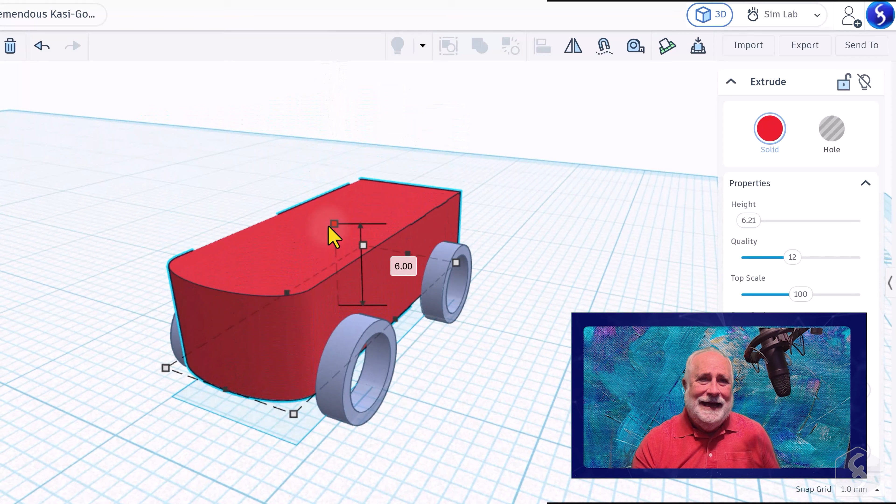Hello and welcome to our beginner tutorial on Tinkercad, a free online CAD tool that makes it easy to create simple 3D models directly from your browser. We're also going to show you how to build a simple toy car from scratch, and we'll prepare it for 3D printing and show you exactly how to simulate it live.

To get started, open Tinkercad.com and sign in to reach your main dashboard. In the top right corner, click Create and select 3D Design. Your workspace will open, showing an empty project and its work plane. This represents the ground plane where you will build and modify all your 3D models.

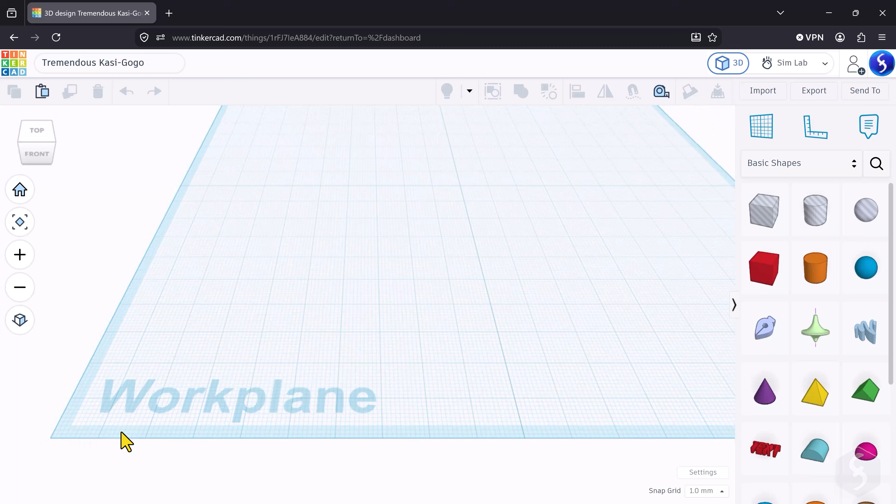Before you start modeling in 3D, configure your project settings by clicking Settings in the bottom right corner. Here you can switch your measurement units to metric, or enlarge the workplane grid if you need extra room.

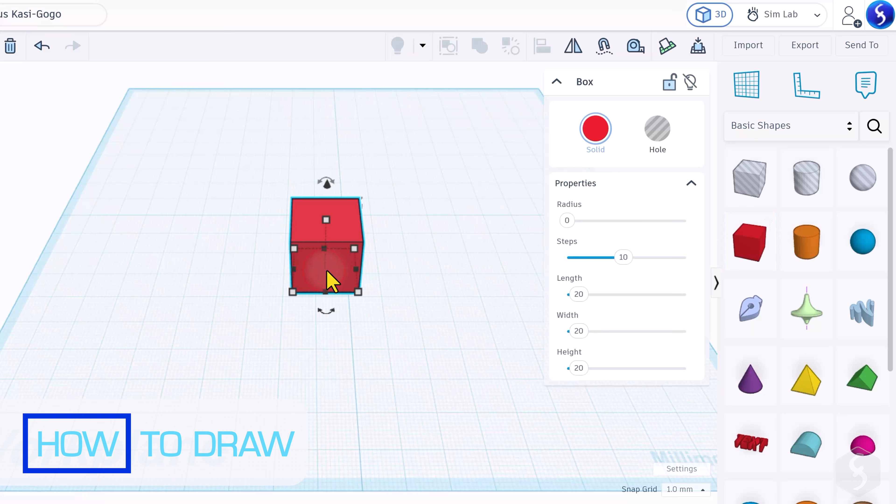On the right panel, you have a library of standard 3D shapes. Click on a box, cylinder, or pyramid to drop it right onto the ground plane. To inspect your design, hold down the right mouse button and drag to orbit around your models, or use your mouse wheel to zoom in and out.

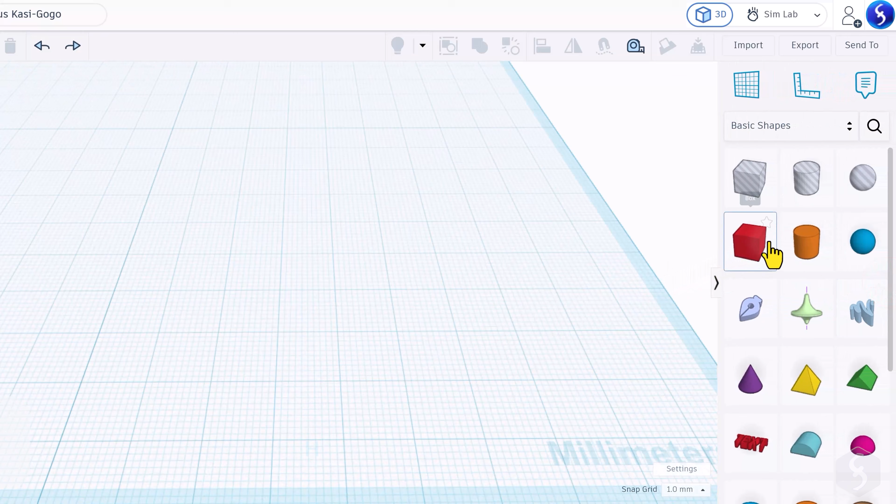Now let's start building the body of the toy car. Instead of using a standard box shape, we can select Extrude Sketch and draw the body directly. Click anywhere on the preview to enter sketch mode. On the left panel, grab the Line tool and click to place connected line segments.

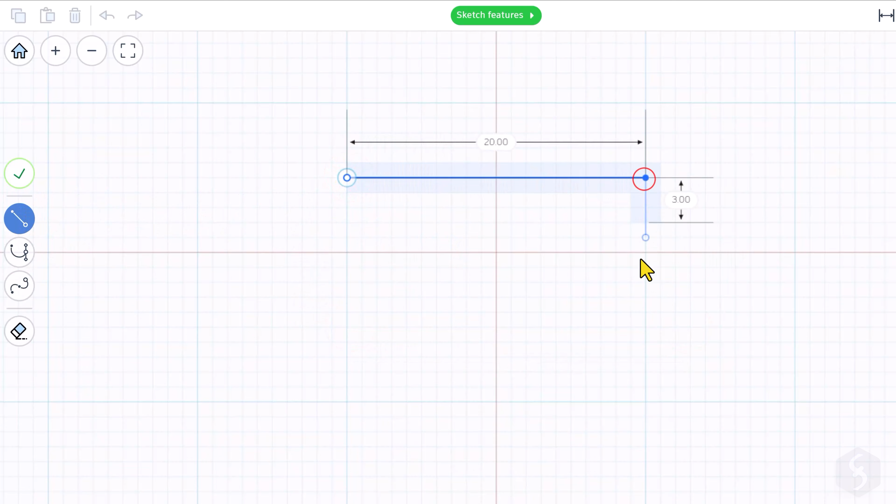If you make a mistake, simply press Backspace to delete the shape. Just make sure your drawing forms a completely closed shape, or Tinkercad won't be able to turn it into a 3D model. If you want smooth curves on your car body, select Edit on the left.

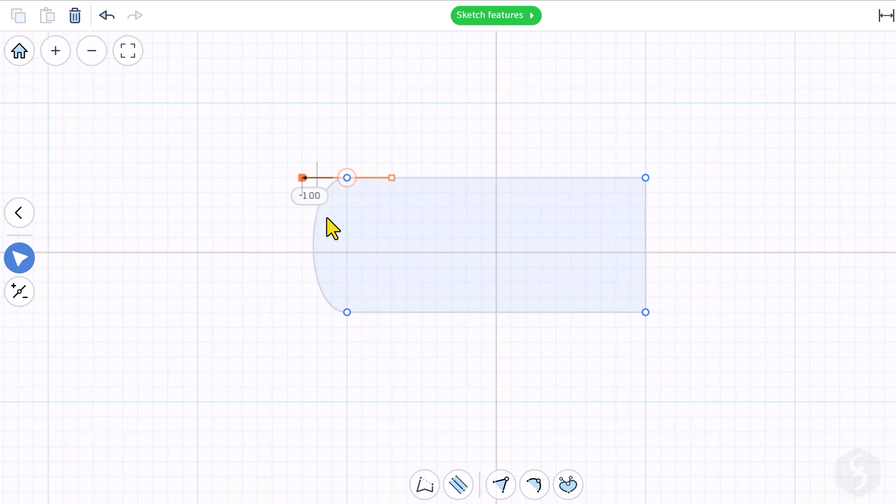Select any anchor point, change its type at the bottom, and adjust the curve using its handles. You can always press Ctrl or Command and Z to undo any changes. When you are happy with your outline, click Finish Sketch in the top right corner.

Tinkercad will instantly extrude your 2D sketch into a 3D object. You can always double-click the design to return to sketch mode and continue editing it.

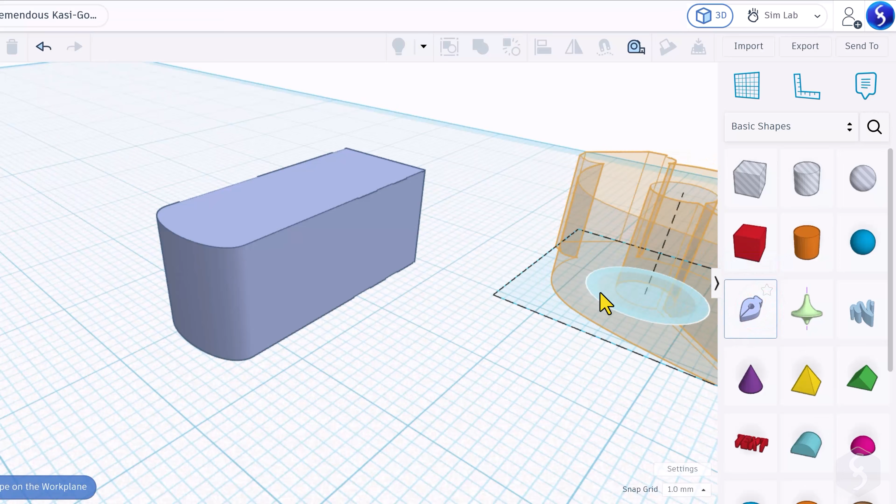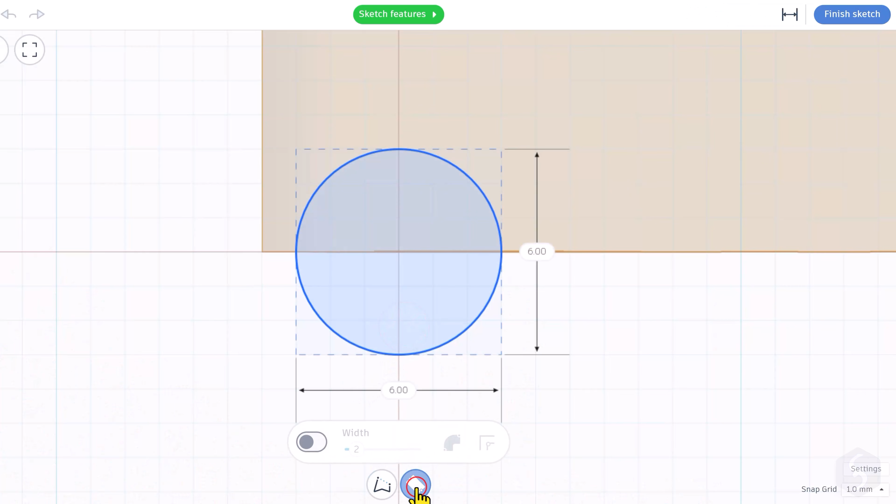To add the wheels, use the Extrude Sketch tool directly on one of the side faces of the car body. Start by sketching a square, which we can easily convert into rounded circles with the Edit option. Click Finish Sketch. The wheels will look like cylinders because the extrusion is too high. To make the wheels hollow, head to Stroke Settings at the bottom and adjust the stroke value.

Whenever you click an object, the Properties panel on the right allows you to adjust its extrusion depth, size, or change its color by clicking Solid.

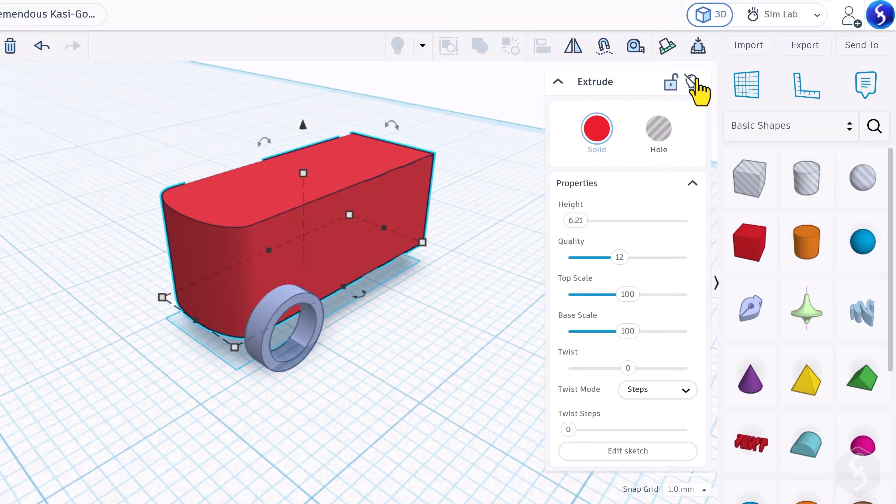In the top right corner of the Properties panel, you'll find two buttons. Click the Hide button to make an object temporarily invisible and unselectable, giving you a clear view of your work. When you need it back, simply click Show All at the top. You can also use the Lock button to lock an object so you do not accidentally move or change it.

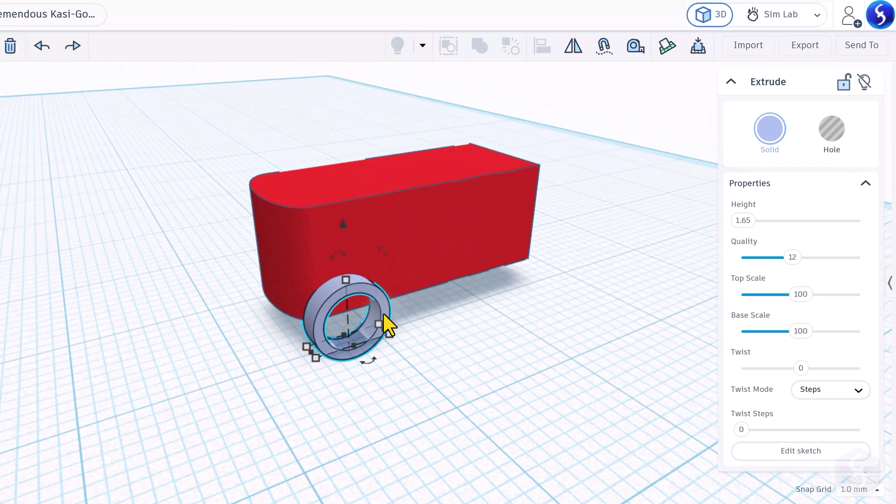How can you position your shapes with absolute precision? When you drag an object, you move it along the flat X and Y axis while holding its height steady. For more precise movements, use the arrow keys on your keyboard. The object moves according to the snap grid settings in the bottom right corner. A smaller grid gives you finer control.

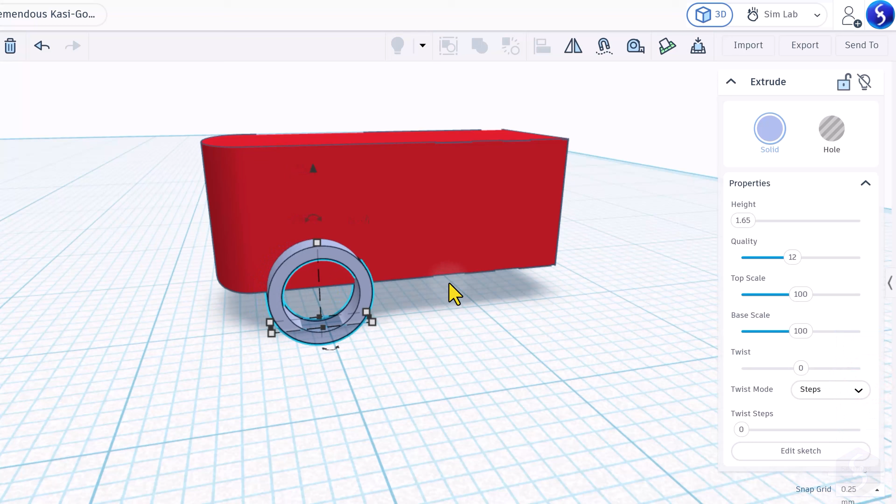You can hold the Alt key while dragging any shape to duplicate it. You can delete items with the Backspace key and undo actions using Ctrl or Command and Z.

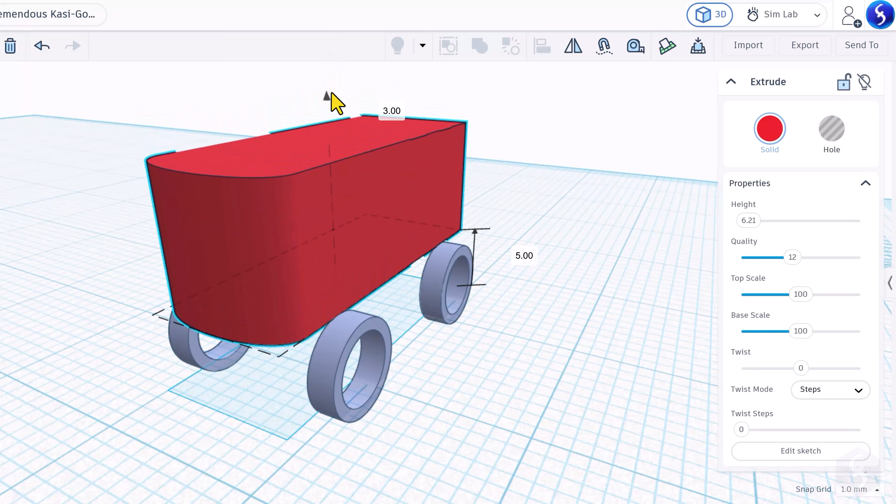When you select a shape, several control nodes appear. Click and drag the black arrow at the top to raise or lower the object from the ground plane, or drag the white nodes to reshape it.

To get exact dimensions, click directly on any measurement, type in your value, and press Enter. You can also drag the curved arrows to turn your shape to the exact angle you need.

Now, let's add two simple holes to represent the seats. Select Extrude Sketch and draw two rectangles on top of the car body where the seats will be.

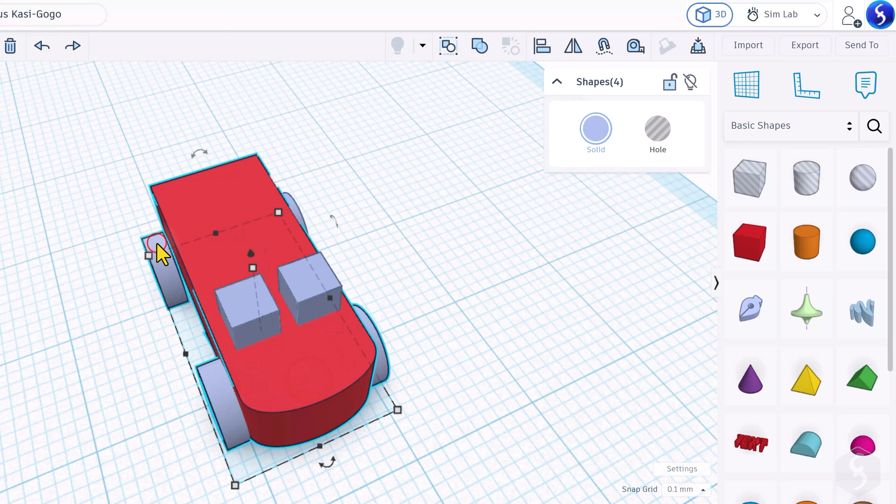If you leave these as separate objects, moving the car later will leave the seats behind. To lock them together, hold down the Shift key and click each object to select them all. If you click Union Group, Tinkercad merges the selected objects into a single solid shape with one set of properties, such as color and size.

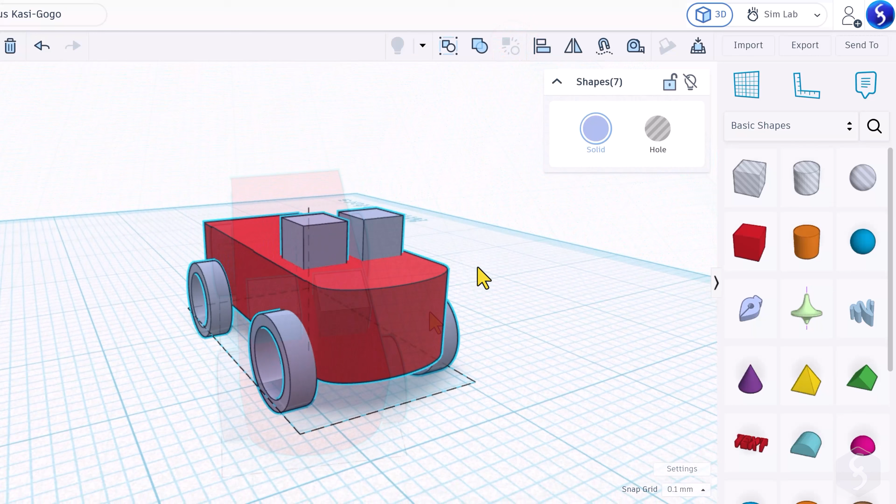This is not the right one for the toy car, so select the object and choose Ungroup to restore the shapes. At this point, with all objects selected, you can use Bundle Group instead. This option allows you to group the objects while keeping the unique properties for each object in the group.

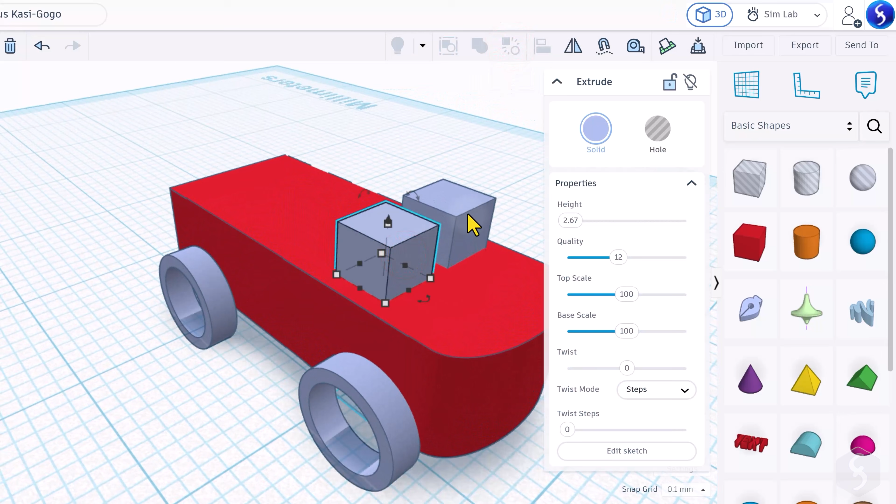You can use these grouping tools to cut the seat holes into the toy car body. Let's ungroup the entire object and place those two seat shapes inside the car at the exact depth we want. At this point, select those two seats and click Hole.

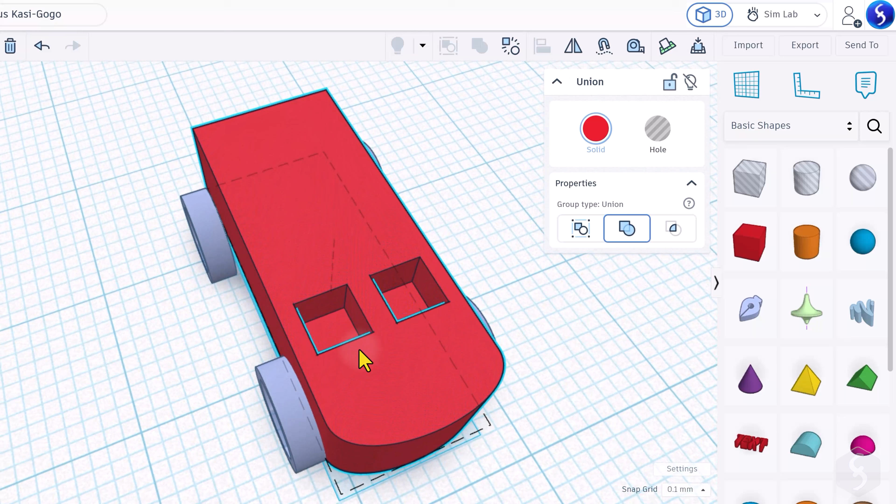At this point, select those two shapes along with the body part and click Union Group to subtract the seats from the rest of the toy car body. Only once the shape is fully completed can you select all the objects again and group them using Bundle Group. Whenever you need to edit the shape again, simply ungroup the object, make your changes, and group it again if needed.

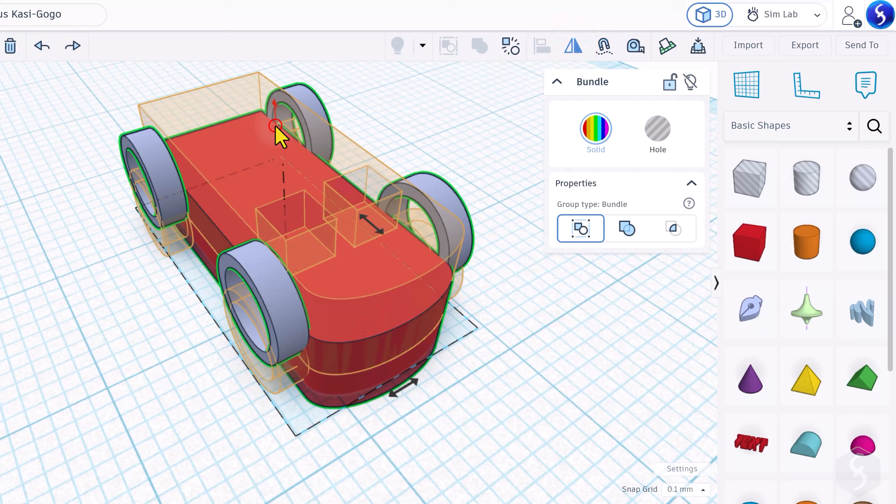You also have several useful tools available in the top right corner. Use Mirror to flip the object, and the Cruise tool to place the base of an object, even if grouped, onto another base.

Use the Align tool to precisely align two objects. Click the black handles to choose the position, using the object highlighted in blue and orange as a reference.

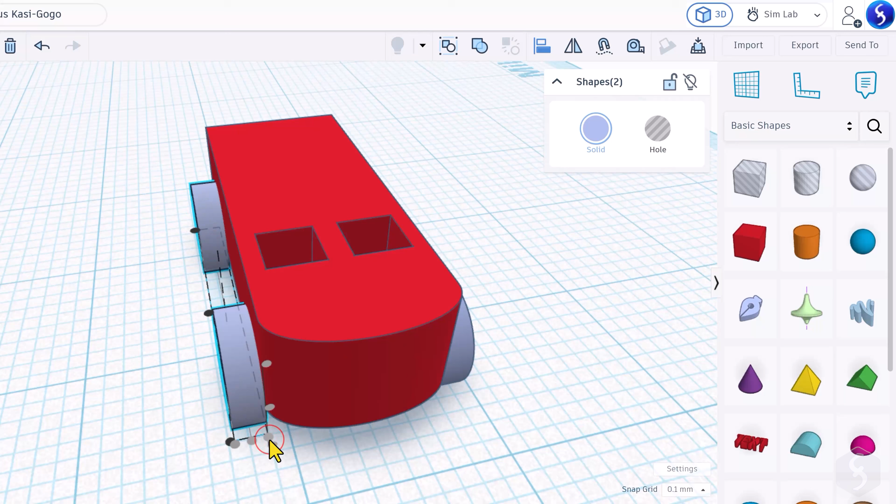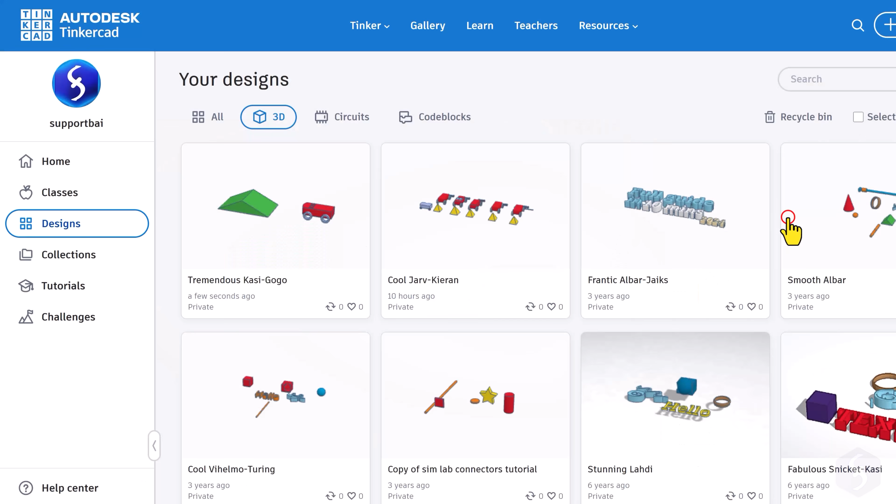How do you save and export your project for 3D printing or laser cutting? Tinkercad projects are automatically saved online and listed in the Tinkercad dashboard, which you can access by clicking its icon in the top left corner. From here, you can open any project and click Export to save it. For 3D printing, export as an STL or OBJ file, or choose SVG for laser cutting.

What happens when you test your shapes inside a real-time simulation? In the top right corner, head to Sim Lab, an environment used to simulate objects. Click any object to adjust its material.

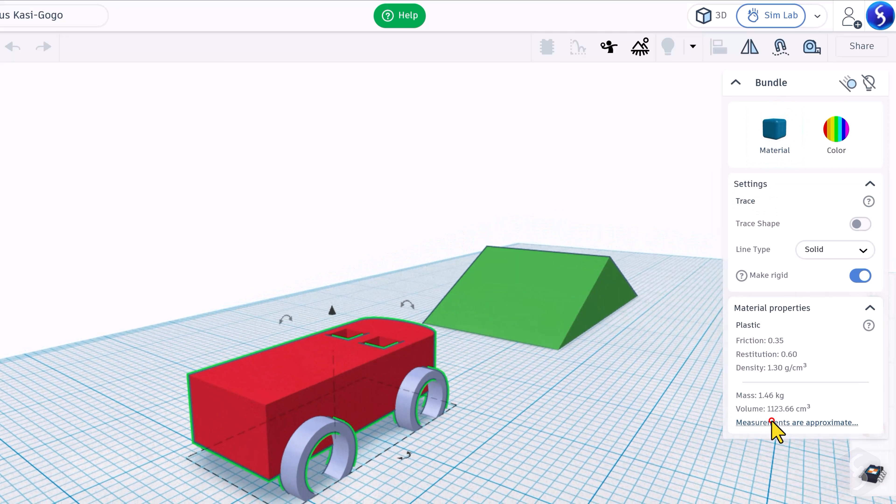If the object is grouped, the material is applied to the entire group. You may need to ungroup it first to apply different materials to each part. You can also open scene settings to adjust the project workplane settings, including material, gravity level, and simulation scale.

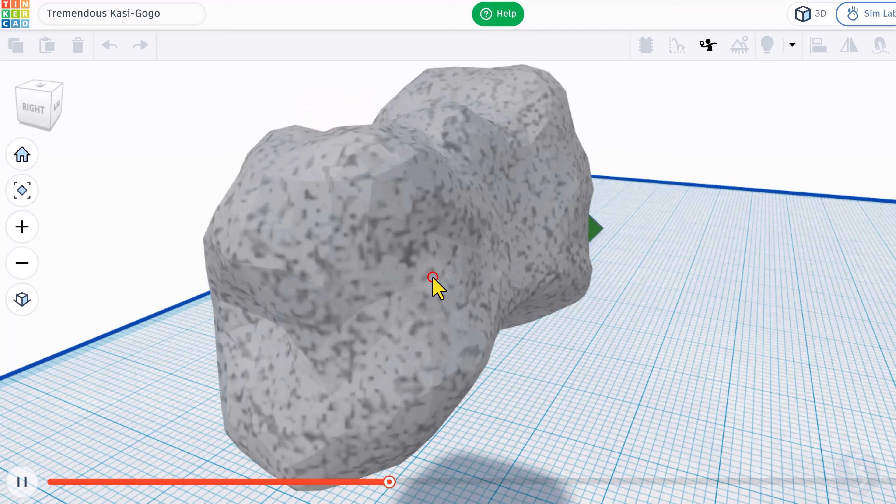Use the player in the bottom left corner to start the simulation and click on the preview to throw objects. You can pause the simulation and return using the sidebar at the bottom. Objects that are not grouped may fall under gravity during the simulation. To return to your original workspace, click Reset Scene on the right.

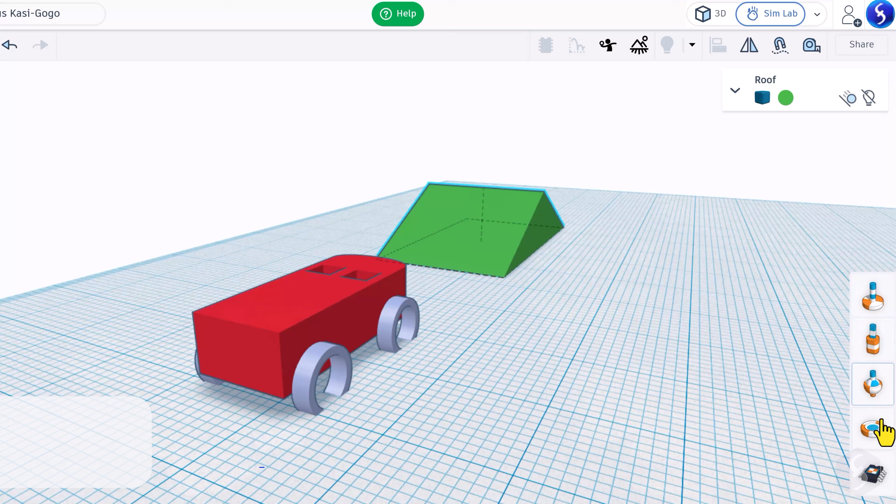Now let's take a look at the connectors in the bottom right corner. These are very useful for applying dependencies between axes and objects. The toy car should move in the direction defined by its structure.

In this case, select the slider connector and rotate it to the correct direction. Then, connect the first orange node to the object that should move along that direction, and launch the simulation to see the result.

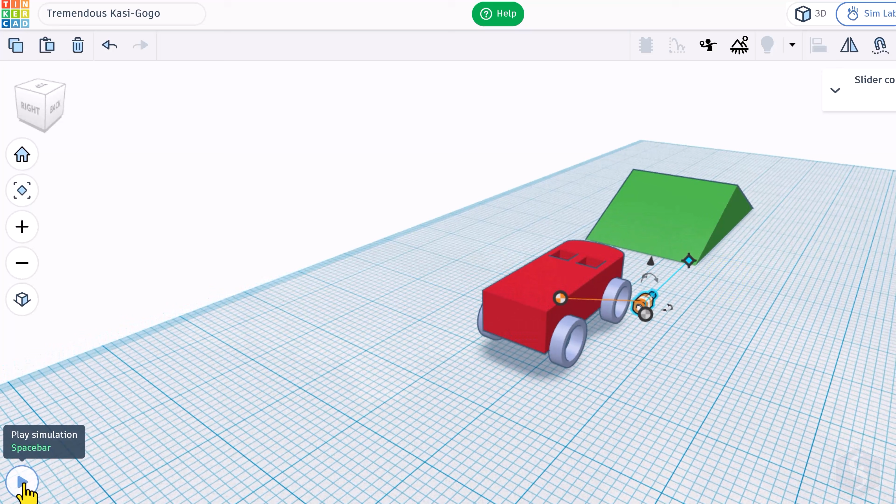If you connect the second blue node to another object, it acts as an anchor and defines the reference direction of the constraint. Let's run the simulation to see how this works.